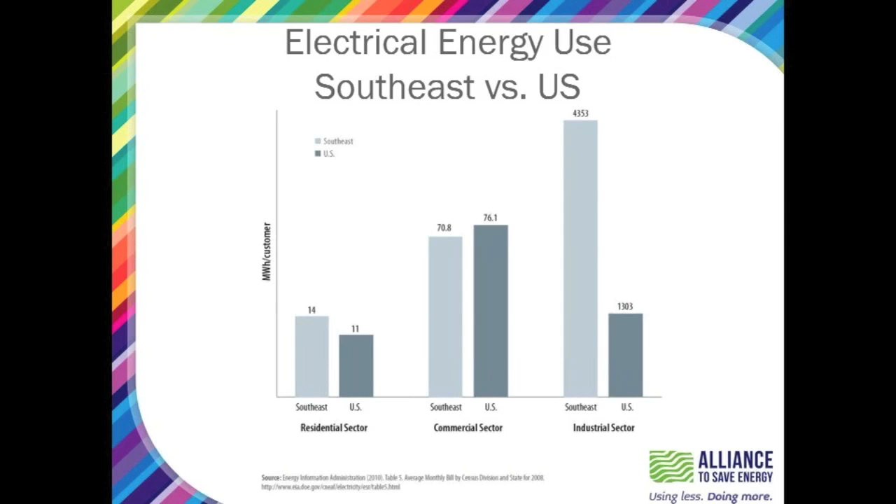Historically, electricity in the Southeast has been relatively inexpensive. My apologies, this chart is a little difficult to see, but because energy has been relatively inexpensive, it attracts greater use. We also live in a climate with weather extremes, requiring air conditioning in the summertime and heat in the winter to keep us comfortable.

And with lower electricity prices, our heat has been historically electric. Also, opportunities for education have not always been available, as it isn't mandated the way it is in certain other states, most notably California. This is another reason why I'm very grateful for Appalachian Voices in providing this tremendous service to everybody today and throughout the course of the year.

Now, energy efficiency isn't just about monitoring the type of fuel used to create electricity, and this is all just background information, because the choices that we all make do matter.

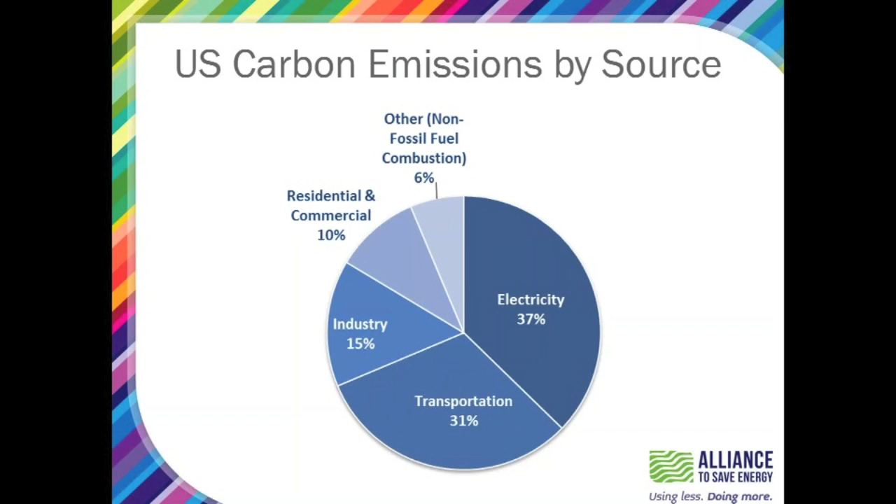Now, as you can see here, the generation of electricity is the primary source of U.S. carbon emissions, even more so than transportation across the board. This is due to our heavy reliance on fossil fuels, specifically coal, and it takes a great deal of coal to literally keep the lights on.

Burning fossil fuels also contributes to other issues, such as particulate matter in our atmosphere, contributing to pollution and health concerns such as asthma. I won't go into the extraction methods for fossil fuels, but of course, as we all know, this is another concern that's not environmentally based.

Unfortunately, fossil fuels are also extremely inefficient sources of electricity. Coal-fired power plants are only 30% efficient. So to break it down, for every 100 railroad cars of coal that you see, all of which are burned to generate electricity, only 30 of them actually produce electricity.

Even more electricity is lost in transmission from power lines to the end user. Current technology can't change the efficiency of the grid, which is why we have to consider alternatives.

We all see that our climate is changing. Although currently it is snowing out here, that's just weather, not climate. And the way we generate electricity does make a difference.

I don't want to just point fingers at the fossil fuel industry because all sources of electricity have environmental impacts. Nuclear energy, while much cleaner in terms of carbon emissions, carries significant risks in terms of waste material. And the prime element needed for nuclear reactors is uranium-235, which is a non-renewable element.

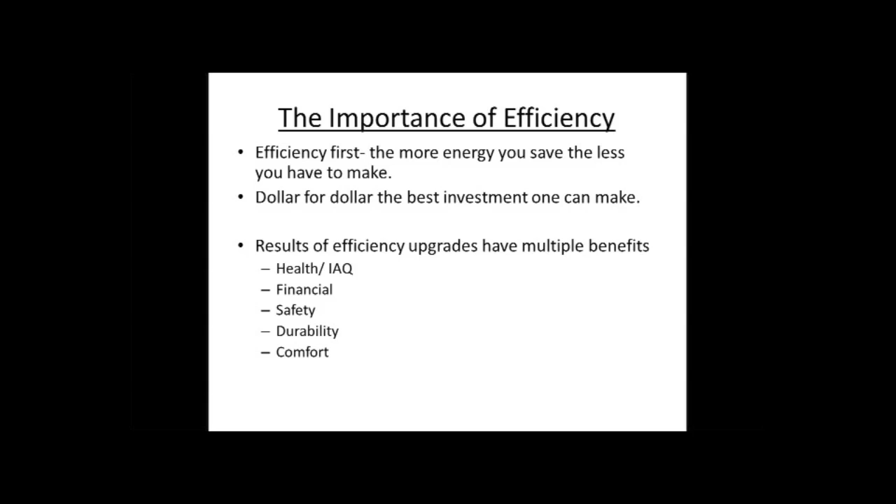We increase the indoor air quality of the home many times. If we have combustion equipment like a furnace, we can actually make the home safer by addressing the efficiency of the home. By stopping air movement, we stop bringing moisture into the home so we can increase the durability. And we can also, of course, increase the comfort. I tell my customers, put a price on comfort. It's hard to do. It's a valuable commodity. Now, this is the pyramid of conservation. This is a great beginning point and a great way to understand the bigger picture as well.

What we see is that down at the bottom are simple things that a homeowner, or even just a resident of a home, can do - knowing how your house works, looking at turning things off, then lighting. As you go up the pyramid, things get harder to do and more costly.

I won't go into each thing here, but I want to point out that the fourth thing from the bottom is air sealing, which we'll see is a really big issue in our homes. Notice the second to last thing near the top is windows. Windows, it turns out, are not the problem in our home. As occupants we perceive them as a problem because we feel the wind blow through them, but as a whole they're not responsible for the majority of our energy losses. We'll talk about that a little later.

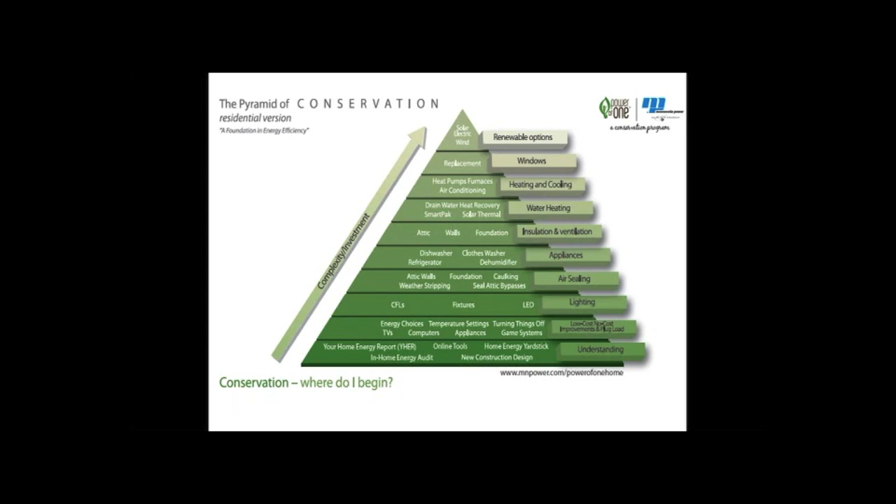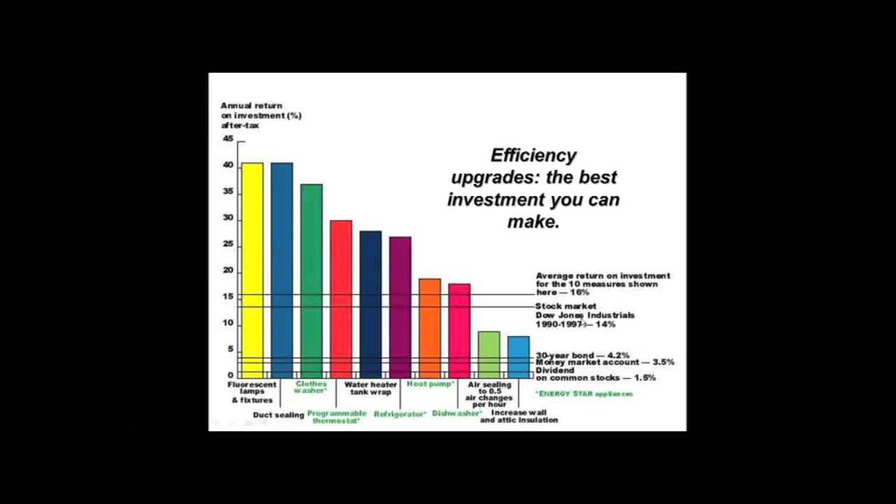Now, we talked about investments. This chart, a little dated, shows the stock market here on the right in the 90s when it was really hot, giving you a 14% return on your investment. Down at the bottom are many of the different energy efficiency upgrades you could do to a home. Take wrapping your water heater with an additional layer of insulation - that will pay itself off and give you a return of about 26 to 27%. So you can see that most of these efficiency features will give you a better return, getting your money back in your pocket sooner than traditional methods of investing. The money argument alone is a no-brainer.

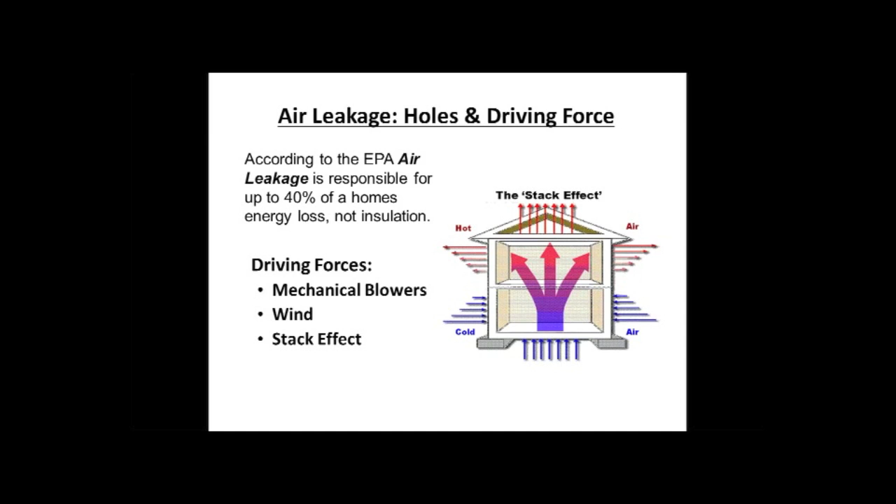Now let's look at our homes. What are the problems? Air leakage, number one. The EPA has found that air moving through our home is responsible for about 40% of our energy loss - so 40% of the money you spend to heat is going out. In the winter, heat rises and escapes out of the top of the home, then brings in cold air from the bottom. If you have a crawl space, that cold air is actually coming through it. The number one way air is driven in and out of our home is the stack effect. If your windows are closed, there is stratification happening in your house, and the air is trying to move through our home.

Now, when we look at this chart, we see the main areas of our home responsible for air leakage are the building envelope - the floor, walls, and ceiling - and then the ductwork, where we put our conditioned air, which many times is outside of our home, either in the crawl space or attic. Notice the windows are only responsible for about 10% of the losses. So when we address energy efficiency, we know it's air leakage first, and when dealing with that we want to address ductwork, floor, walls, and ceiling. We can address all these things later, but their overall efficiency and payback are longer, so we want to hit the low-hanging fruit first.

Do notice the fireplace here. An open hearth fireplace, by the way, many times is negatively efficient - it actually causes more heat loss than you gain, so it's something to be aware of.

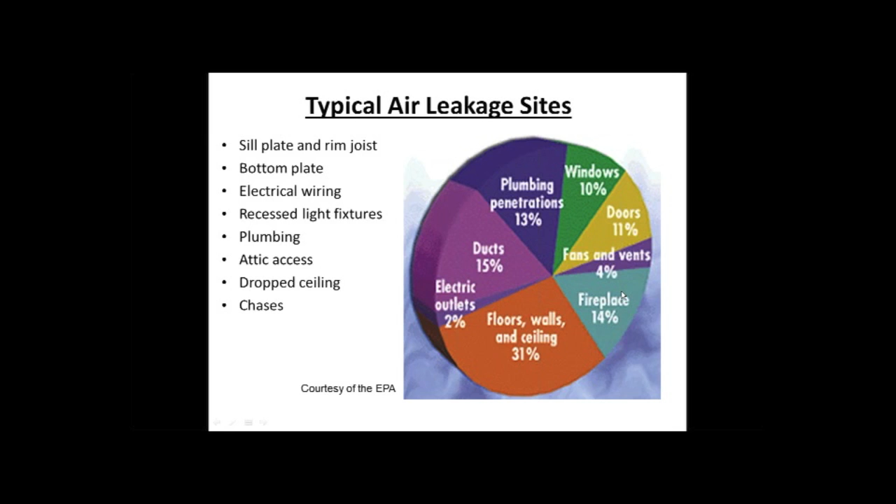Another EPA picture here showing where our heat goes through air leakage. We see the red and orange arrows rising out of the attic, out of the ceiling, and then we draw in cold air from the bottom. If you air condition, this is reversed - cold air sinks, so we let cold air escape out of the bottom and draw in hot attic air.

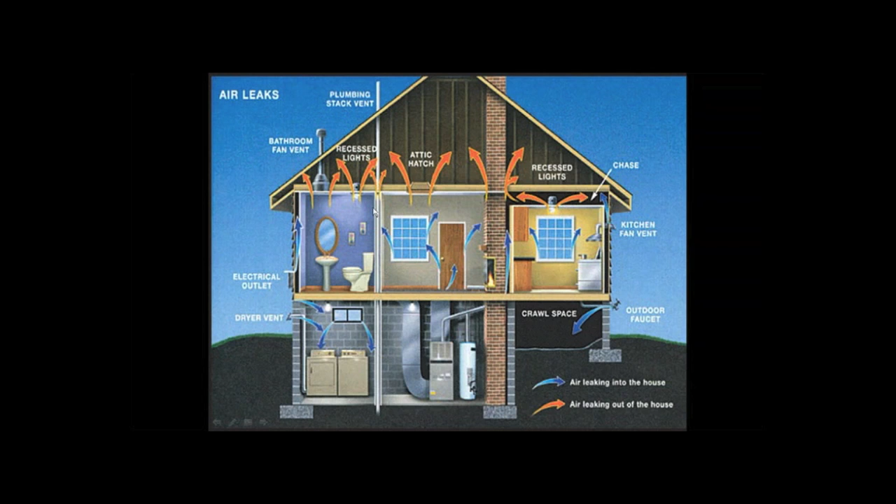So what happened here, nobody really did anything wrong when it came to the construction of this home. There was just nobody responsible for the air barrier or the air leakage of the building.

So we have a bathtub put in, and a nice large hole is left open. If this was a crawl space, there's not the most healthy air down there, so we tend to draw that air into our home. Many people often ask, why does my bathtub cool down so quickly? Well, this is the reason - you're drawing cold air around it.

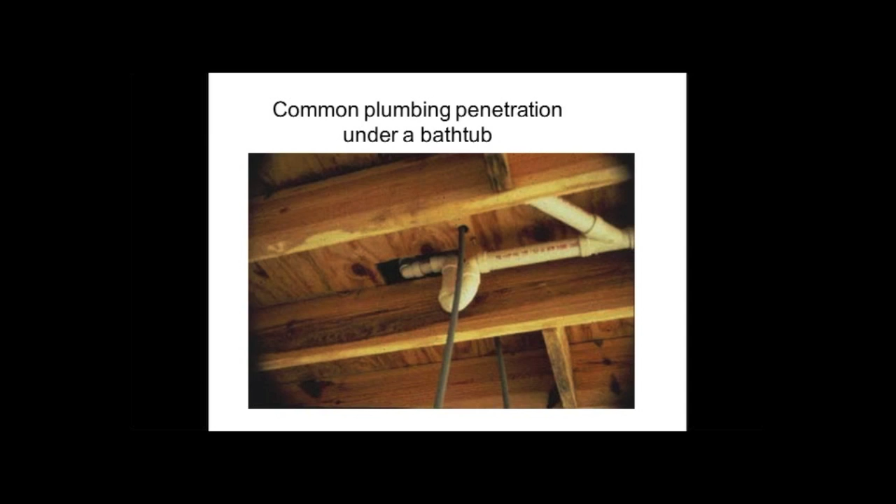And you see all this dirt - this is acting as a filter. This insulation is a filter. So what we want to do is air seal this and stop that air moving, and thereby the dirt.

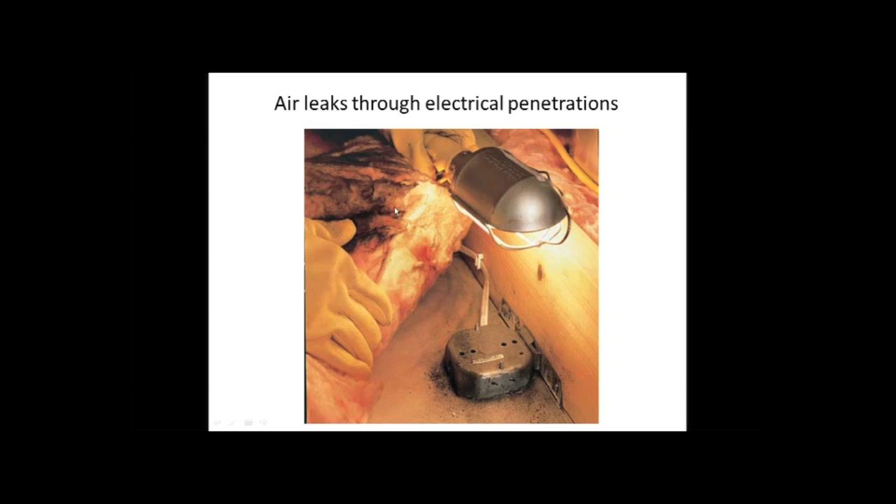By the way, many times the color of the dust can tell a building scientist what's going on in the home. This looks like they may have had a fireplace in there, or burned a lot of incense or candles, because it's a sooty type of dirt in the insulation.

Now, how do we solve that? Stopping air leaks, we can save 15 to 20% on our energy bill, depending on the home.

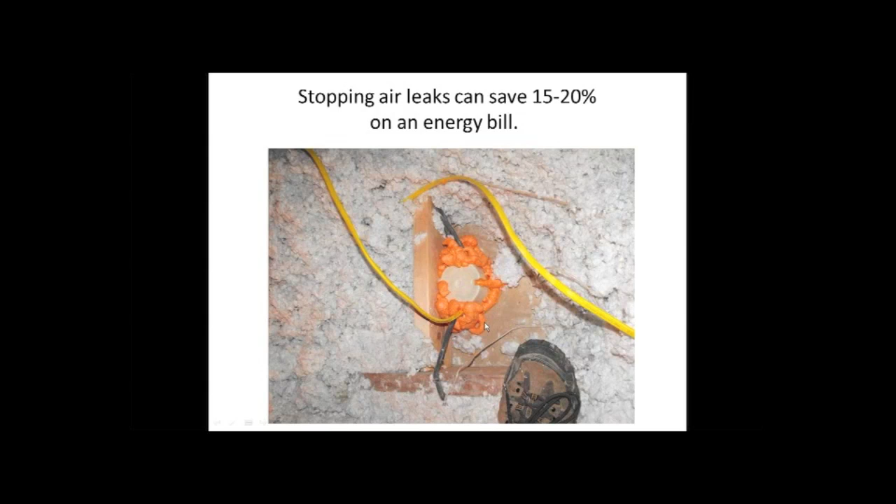Here we just use some foam out of a handheld foam gun or your typical Great Stuff can and seal that up. Another picture shows where we have wires and wall top plates - we want to seal that up too. So essentially we go and make a map of your ceiling, then find your interior wall top plates, your wires, and your lights, and seal that up, and do that below as well.

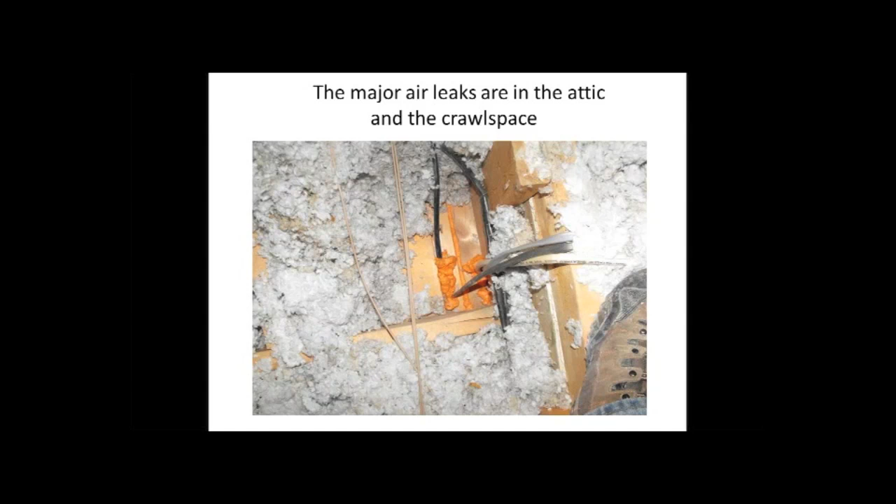Getting on to ducts. Ducts are just as important as the building envelope because they have our conditioned air, our expensive air that we pay money for, and we want to seal them up with mastic.

Tapes don't work. The EPA has done a number of studies across the nation and found that 20 to 30% of your conditioned air is lost through leaky ducts and through tapes that have failed. So we really want this paste-like substance on this. This is something any homeowner can do as long as they understand it, or you can also get a professional company to do it.

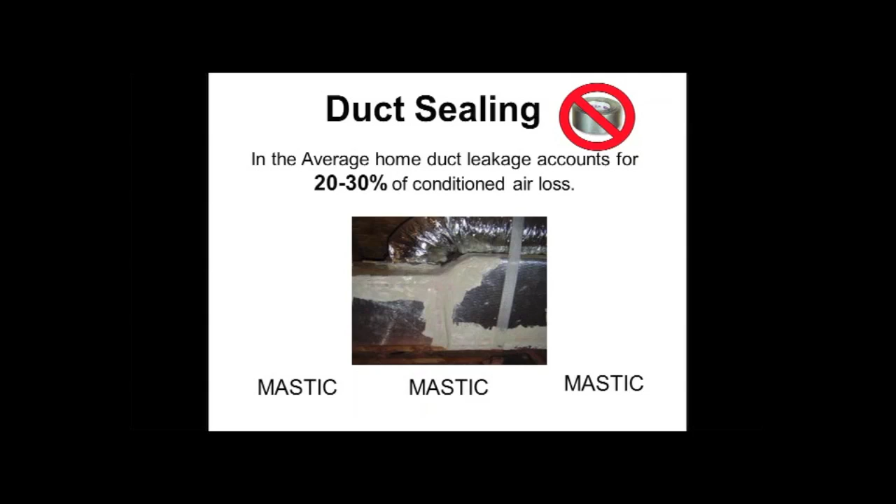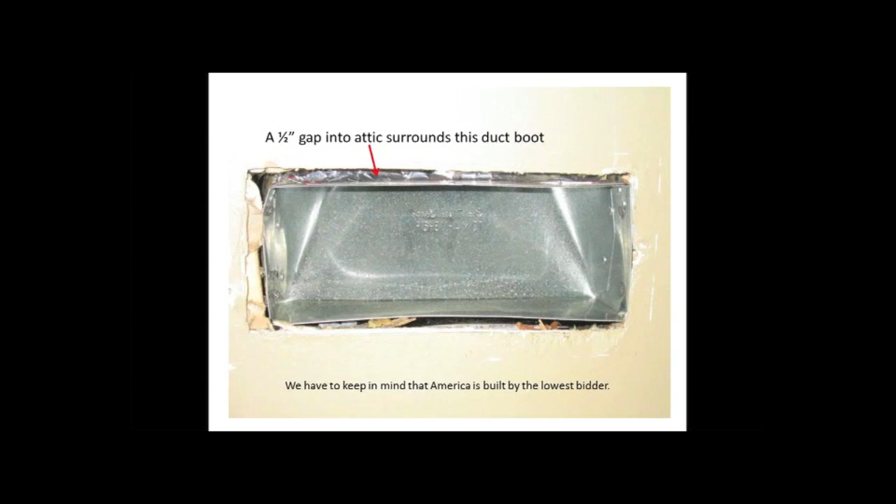Now you wonder, wow, that's a pretty sloppy job. Well, we have to keep in mind that America is built by the lowest bidder, and as consumers, we've made that choice to have a cheaper product, and that's essentially what we're living in. And then we have companies like mine that get to come in and fix all the problems when the home's too costly to live in or not comfortable.

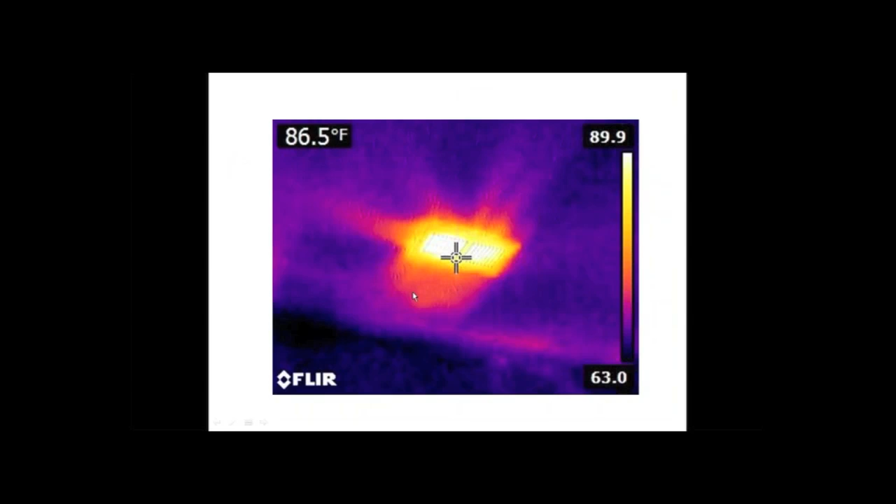Something we see in probably about 15 to 20% of the homes we go into is just broken ductwork. We use lower cost materials like this flex duct, which in general is okay, but over time it ages, or you have different people going into the crawl space and damaging things. We see all sorts of broken ductwork, and people find that they can't condition part of their home, or their heating system is just operating for long periods without cooling or heating, and it may be a problem like this, which is quite common.

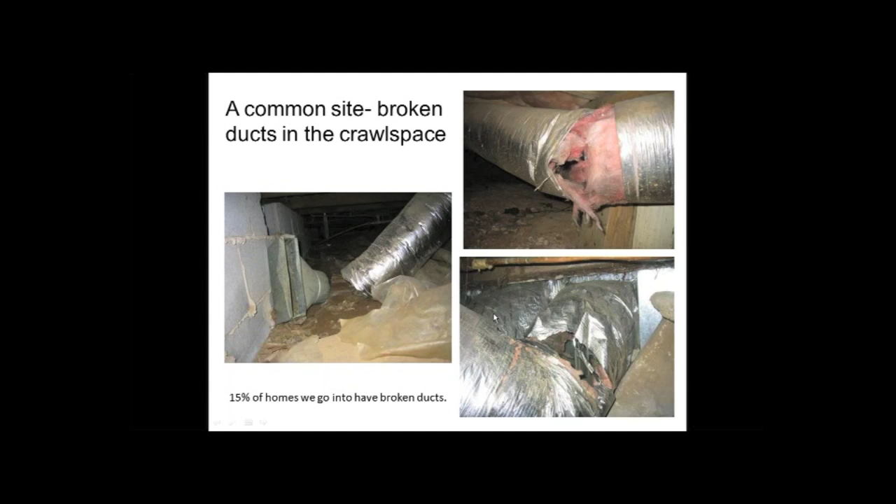Now we get to insulation. We've talked quite a lot about air sealing, which is the most important thing, and then we come to insulation. People ask, what's the number one thing you should do? And it's always air seal first and then add insulation. Adding insulation in a floor system or an attic without air sealing, you'll only get about 60% of the effectiveness out of that insulation. Insulation doesn't stop air movement, and air movement is pretty much the number one loss of energy.

So once you've air sealed, let's look at insulation. There are many options out there, and it depends where you're installing it and what your needs are that will really make the call for you. But we really want to focus on the ceilings and floor first, then followed by the walls.

And that's in general because really our heat goes through the ceilings and the floors more than it does the walls, through the stack effect.

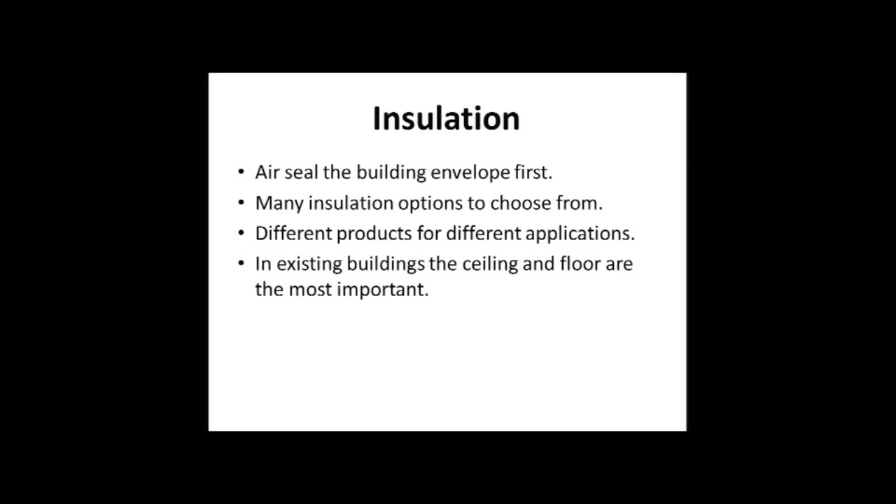Whenever we have a plane change in our attic as well—for instance, here's a vaulted ceiling, they're very popular—we basically can have a situation where areas aren't insulated. So you can see the bright, hot attic. This is a summer day. This whole wall that is exposed to the attic is not insulated.

And this once again comes down to just the lowest bidder being responsible for the building envelope here. The insulation company did not insulate this wall. Once again, very common out there in the real world.

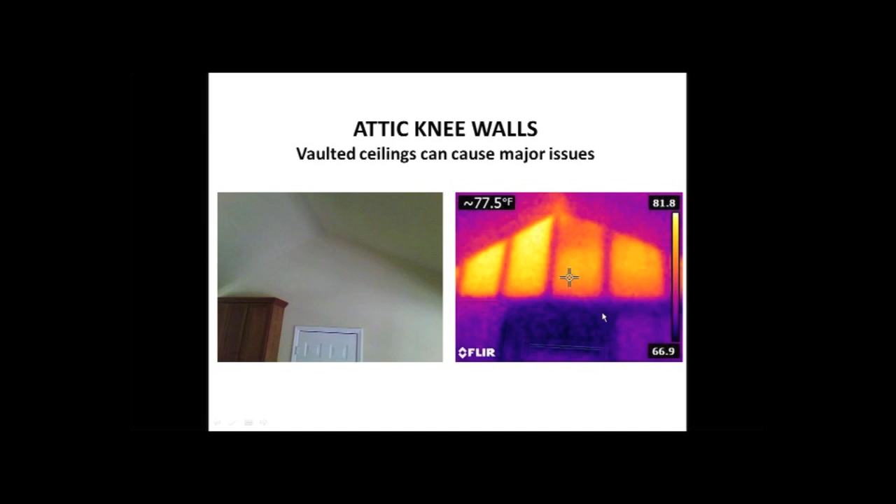And you can see, when we start changing the building envelope from a simple square or rectangle, and when we start adding these wall changes and ceiling changes, you're really depending on the insulator to understand how the building envelope works and to understand where both the thermal envelope and the air leakage points need to be protected.

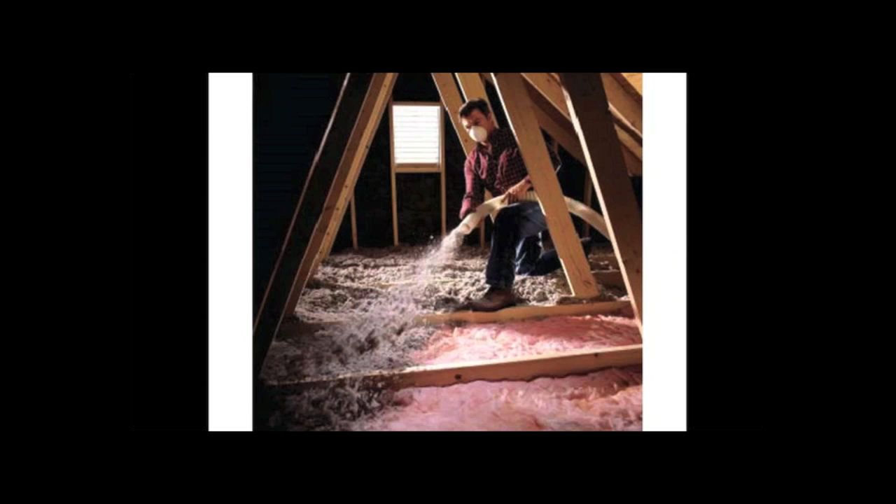Here's a common thing for an existing home: you can go in and add additional insulation. We like cellulose insulation—it's a recycled product, one of the better insulators out there, and it's a pleasure to work with. However, other insulation products are available that do a fine job as well.

Now, that was the building envelope. There's a whole lot of other things we can talk about with the building envelope, but let's get on to some other uses. When we look at where we use energy, most of it's used for conditioning—heating and cooling. The next large amount we use is for water heating and water use, so we want to address that.

Switching to Energy Star appliances, you can do the math and realize that it pays to get rid of your old appliances and get new appliances right away. Don't wait for them to break down—to keep them is costing you money in the long run.

Water use at the faucets can be easily changed with aerators. These cost about $1 to $2—this has one of the best paybacks in energy efficiency. It'll pay itself off in about a week, and then that money's going into your pocket. And of course, shower heads as well. We save twice with low flow fixtures, because not only are we saving on the water cost, but also we're saving on the cost of heating that water.

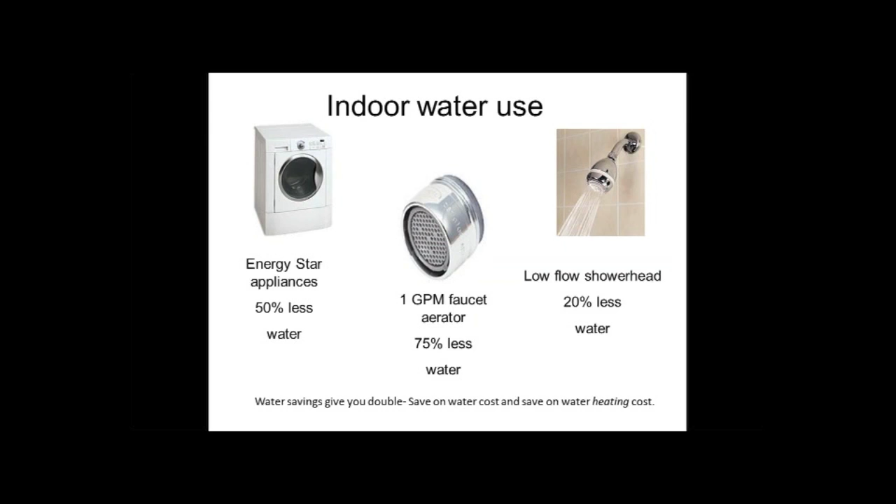Mainly with appliances, look for the Energy Star label. Generally, they're going to be about 15 to 20% more efficient than the standard appliance that's not Energy Star rated, and you can get a lot more efficient than that. Usually it's worth the money, and usually what we found is that Energy Star rated appliances are built better as well, so they actually have a better track record than a regular appliance.

In water heating, there are a lot of options out there. I tell people look for the Energy Guide first, to make sure it has an Energy Star logo on it. One of the most efficient water heating options now is the new heat pump water heater, much like a heat pump for your home—a very unique device. It's been out for a little while now, so they've worked out the kinks.

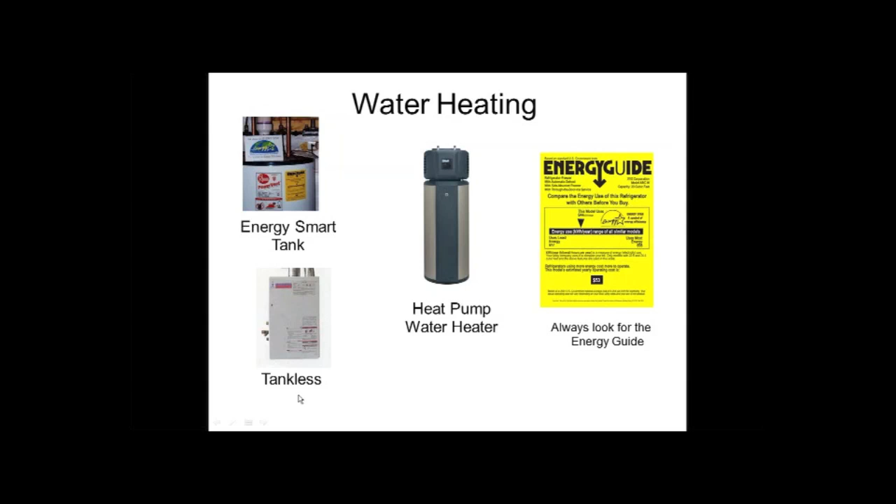Another option is the tankless, but you do need gas for that. You do not want an electric tankless, because they will not save you money.

As mentioned before, lighting—we have to understand that the incandescent bulb is 146 years old this year, so I think Thomas Edison and the others who worked on that are probably ready for a change as well. It pays to get rid of your incandescents right away and replace them. If you do have compact fluorescents, wait for those to burn out before you replace those with LEDs.

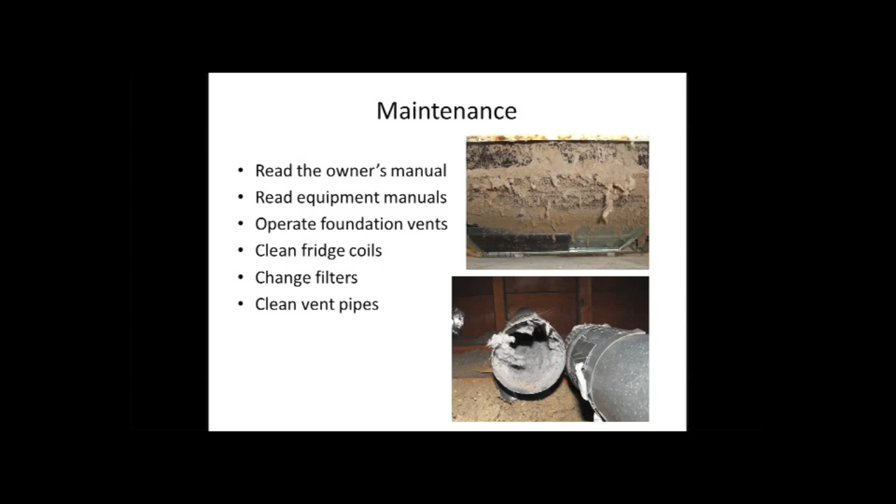This was a 30-foot long run, which is too long, but this is also the fifth cause of house fires. So make sure you read those manuals and maintain the equipment. I recently learned that my dishwasher has a filter on it on the drain end, which will make it more efficient. And finally, get an energy audit.

It's just like when you go to the mechanic with your car, they don't look out the window and tell you what's wrong with it. They take it into the shop, plug it up, test drive it, and do all these things. So you can get an energy audit and have a blower door test done, basically getting a mechanic of sorts to look at your home just like they look at your car. And with that, I thank you.

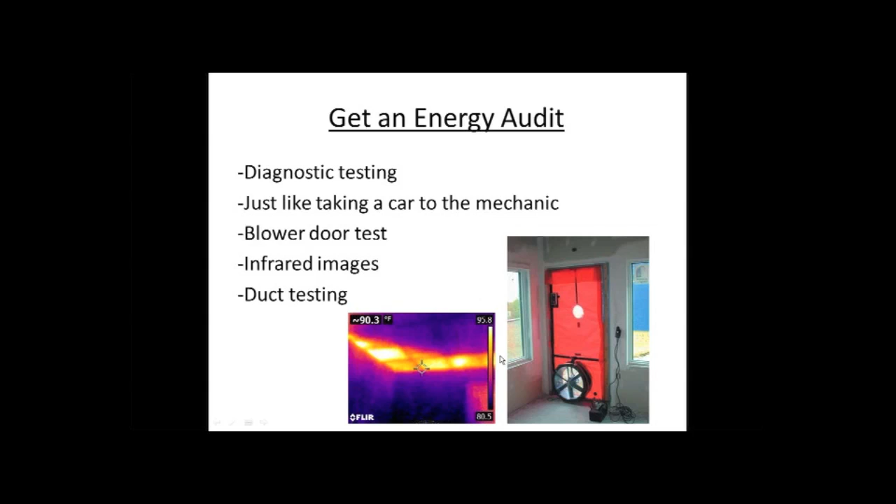Fantastic presentation. And we already have a great question from the audience. Again, if any of the rest of you have questions, just go to the drop-down menu on the right-hand side of your screen. So the first question is, many of your recommendations apply largely to homeowners, but as the owner of a condominium, what kind of energy efficiency steps can I do to improve my condo's efficiency?

That's a great question. Generally, condos are standalone as far as the energy. You're paying your own bill for your own unit, and generally they only share a wall. Now I'm talking about 1 or 2 story units that have their own attic and own foundation. You can still address the foundation and attic just like you would a normal home.

If your condo is in a multi-story building where you have units below and above, often when it comes to air sealing, you can look at your interior walls, your interior finishes that are adjacent to another unit, and seal those areas up just with simple caulk. You can also look at your appliances. So it just depends on the individual unit, but many times they can be addressed just like a home, and the only difference is you have adjoining walls that you normally wouldn't deal with first anyway.

Excellent, thank you. We have another question, which I'll paraphrase slightly. The first part is, are there flammability concerns with the spray foam sealants and light fixtures? And also, would you recommend an energy audit before doing air sealing?

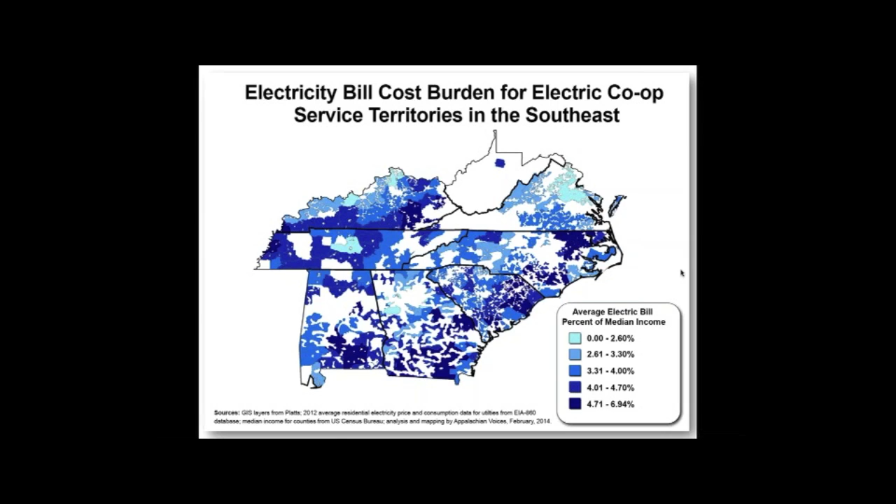Energy efficiency, as evidenced by the existence of companies such as Marcus's and Conservation Pros, can have a significant economic impact. Because of that level of potential, that level of need for savings, there's potential for a significant amount of investment in energy efficiency in local communities throughout the region, and therefore energy savings on our utility bills. It's not just the money we save on the bill, but what we do with that money that expands that impact when we re-spend it in our local economies.

This combined together helps increase the demand for energy services and products, which results in new or maintaining local jobs, because the vast majority of jobs created through energy efficiency are local jobs.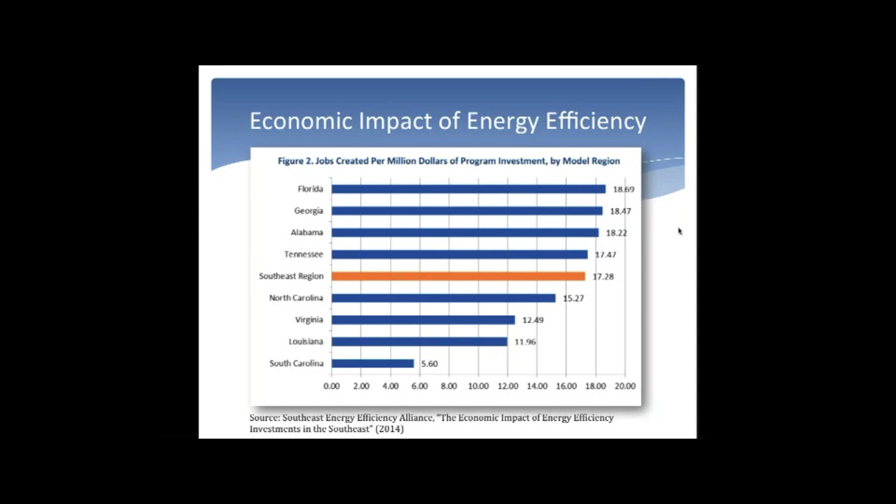When I was putting this presentation together, one of the thoughts I had was that I could go through every single type of energy efficiency financing available to folks, particularly those listening. But I'm going to glaze over that and direct you to resources where you can find more about what is available to you through federal, state, and utility programs, and other opportunities for supporting home energy efficiency improvements.

There are incentives and programs accessible for residential, commercial, industrial, nonprofit, local and state government, and tribal entities, and electric utilities to support greater investments in energy efficiency and to support residents like ourselves to be able to pay for those improvements. These come in various types: grants, loans, home energy efficiency mortgage options available in certain areas, performance incentives, and tax credits.

All of these are available out there, and I encourage everybody who's listening to take a good look at the DSIRE website—the database for state incentives for renewable energy—to see what's available to you through your state, your electric utility, or from the federal government.

There's a couple to point out. One, there is a residential energy efficiency tax credit that allows for a credit up to $500 for a wide variety of home energy efficiency improvements. Unfortunately, that is set to expire at the end of the year, so if you're able to make those investments, this is a good time to do that. And I apologize for the fire engine.

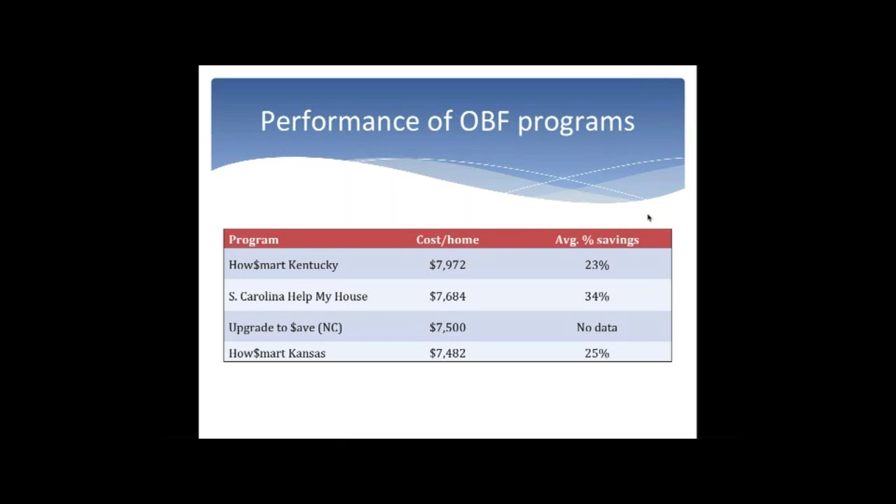There's another program model, and I only have about a minute so I'll glaze over this, but it's called Property Assessed Clean Energy Financing. There's a lot of details that go into this, but if you're interested, reach out to me or do some research online to see if your state has authorized PACE programs. It's another on-bill type of financing for energy efficiency, renewable energy, and water conservation, where you repay that investment on your property tax bill. And if you move out, that repayment obligation stays with the property, and you don't carry that debt with you.

These are leveraging millions of dollars in investment, over 1.2 billion invested in the residential side alone. I apologize, I should have turned my calendar off.

I'll stop there. There are a number of resources. As I mentioned, the Database of State Incentives for Renewable Energy is a great resource to find out what's available to you in your state through your utility, your local government, or otherwise. And if you want to learn more about Property Assessed Clean Energy financing, pacenation.us has a lot of information, including a state-by-state breakdown of the status of PACE programs or legislation in each state. So I'll stop for questions.